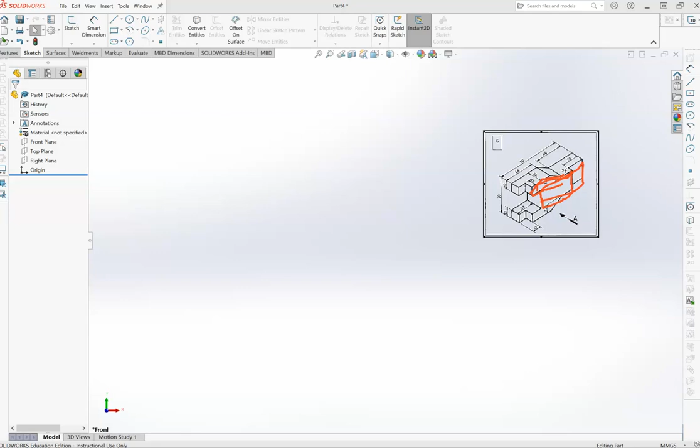So I'm going to show you how I would approach this, and it might not be the same way that you would approach it, but that's fine. We just have to make sure that we're getting all of the things that we can see and getting all of the dimensions right.

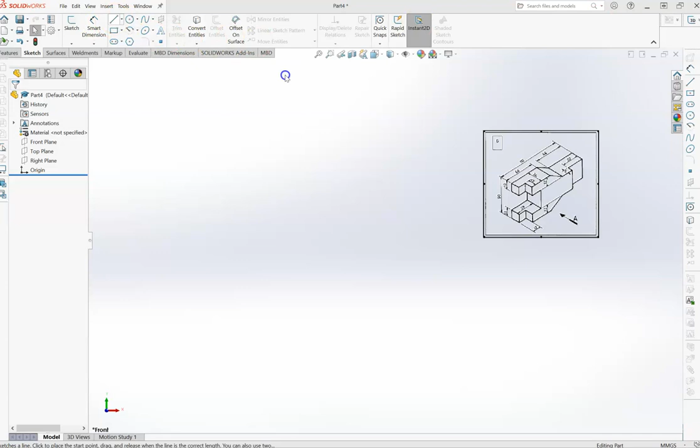Okay, so the first thing that I'm going to do is I'm going to draw this Y shape that's on the front. I think that's going to be the most straightforward for me. And so I want to use my pen tool. I want to do it on the front plane. Click the pen tool, and here we go.

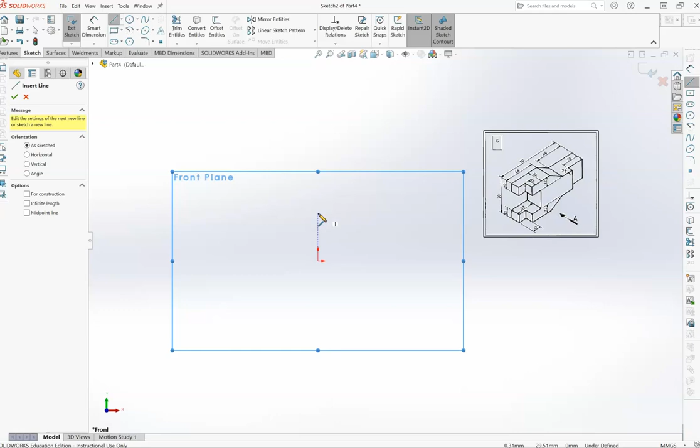So from the center, I'm going to draw the top of that Y. So I'm going to go left, and I've got 46 is the measurement for that bit there, 46. And then I've got 12 millimeters.

Remember, we're going to use the snapping to vertical. And then that bit's 28, and that bit's 12. So 28 minus 12 is 16. And then the height of that centerpiece is 50 minus 12 minus 12. That's 26.

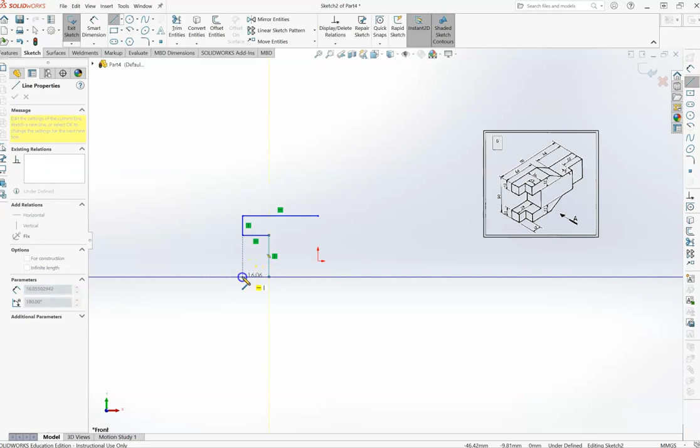About there somewhere. And then we want the next bit to line up. And the next bit is 12. And then we want this bit to line up. Should be 46.

Okay, and then we have these angles. So we generally never have a dimension on an angle. It's usually a dimension of the pieces of the triangle that make it up. So I'm just going to draw an angle for the time being, and we'll fix it in a second. And then I need the next bit, which is 44 minus 20, which is 24.

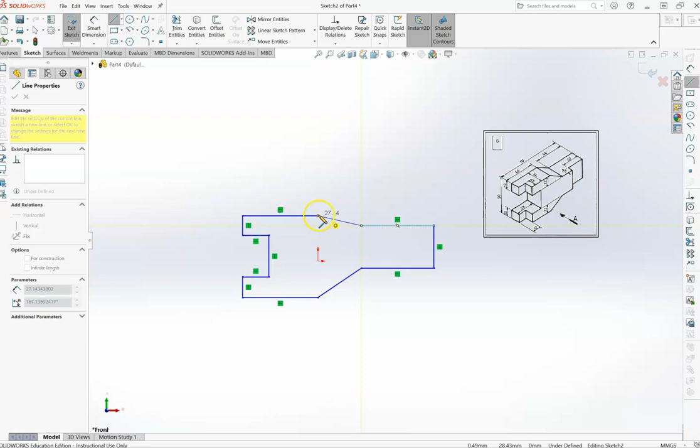We just might do the whole 44, and I'll cut that piece out. Whole 44, and then up. That's that 26 again, and then back to line up with there, and then angle. Okay, so I know that I joined it all together.

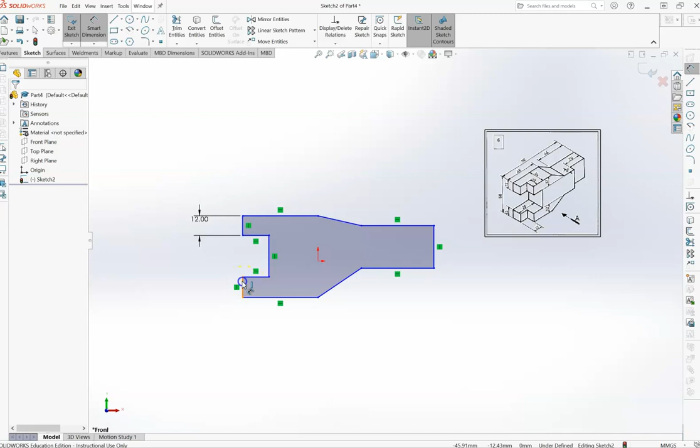Let's use the smart dimension to get this to work. Okay, so we want that to be 12. We want that. Oops. This one here, not the center line. Make sure you're on the line and not the dot. Is 12. This one here is 26.

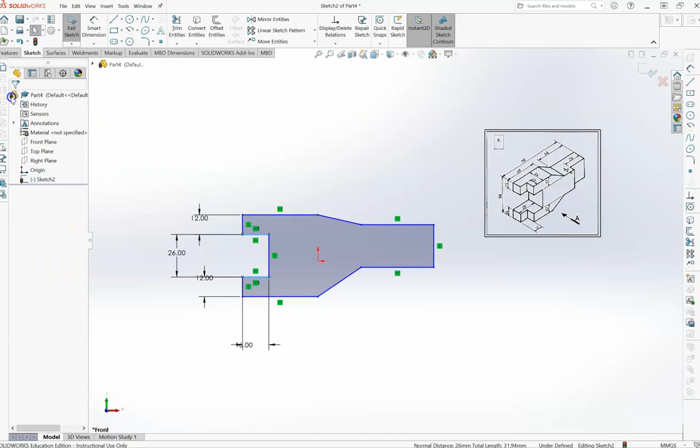Okay, then I have this one is worked out 16. 28 minus 12 is 16. And this one, turn the smart dimension off and make sure that this line and this line are equal. Tick. Now equal. And this line and this line are equal.

And this line and this line are equal. I'm just going to force all of that. And then this line, let's smart dimension. This line here is our 50 minus 24, which is 26. And this line here is 44.

And then we know that the front bit's 46, the back bit's 44, which is 90, and this center bit, sorry, the whole thing is 110. So I can have the whole length. What I do is click the front, hold down the shift, click the back, and make sure that is 110.

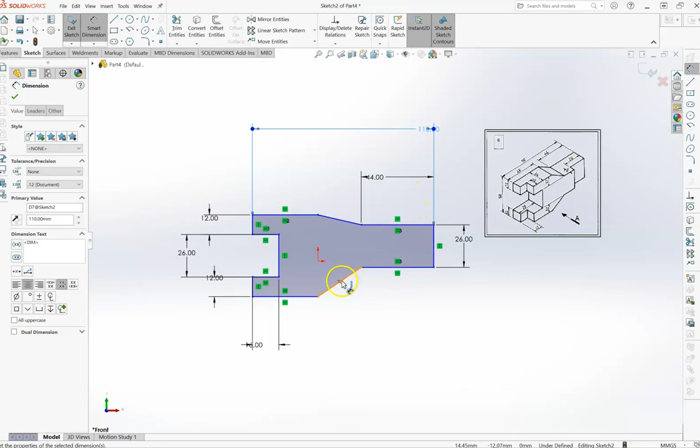Yep, and then I can make sure that this one, hold down the shift key, and whoops, I was in smart dimension, sorry about that, turn smart dimension off. This one and this one are equal. And see how it just snapped it all into place? So now I have that really nice Y.

Okay, and now we have to extrude that, and we'll add the bits that we need, cut the bits that we need.

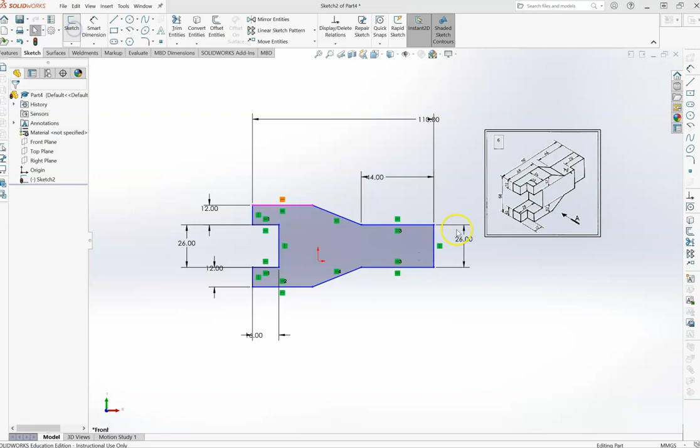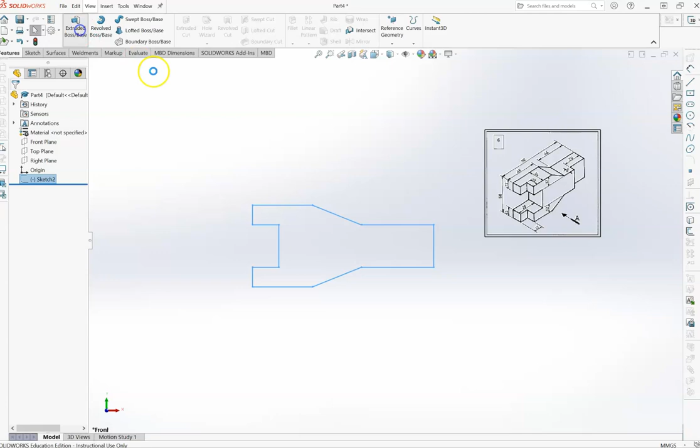Okay, so I'm going to exit this sketch, and we're going to extrude this sketch. So let's go to features, we want this to be, let's go with 12. Yeah, let's go with 12, and then I'll show you how to do, no, let's go with 24. 24, extrude boss base. There are multiple ways that you can do anything, remember. 24, and tick, it's now 24, done.

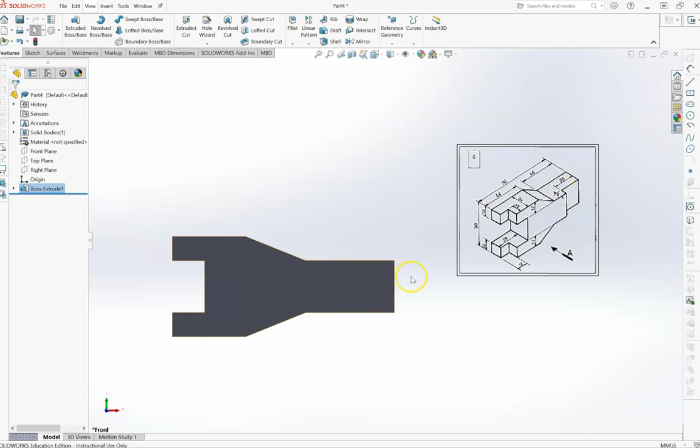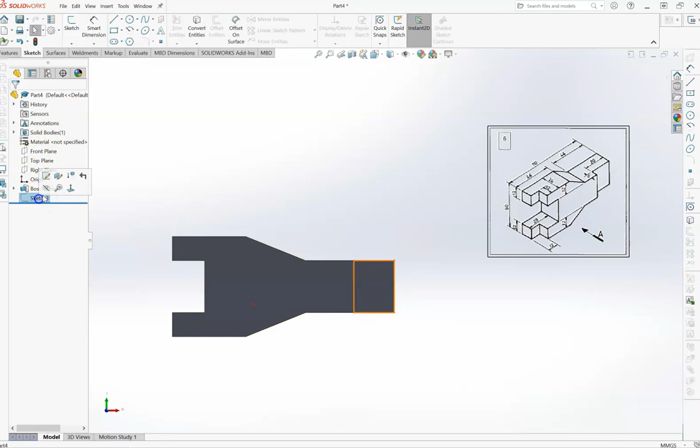Okay, so the problem that we have is we need to cut out a bit and we need to add a bit. So let's go to Control 1, let's draw out the bit that we need to cut. We need to cut on this face. So let's go to Sketch, and we want that to be from this corner down to here somewhere, and I'll smart dimension it to get it right. Okay, so that should be 20. 20, right, and so now I can cut that, highlight the sketch, features, extruded cut, and if you notice the cut is only 6 mils, so we've got to type that in, 6 mil, and tick.

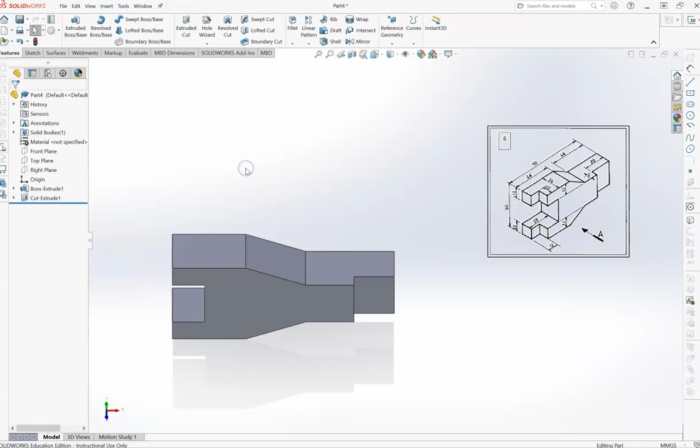There's my cutout, and now I need these bits here. Hang on, I'm just going to show them to you. These dicky outy bits here and here. Okay, so let's go draw those on. I'm best off making sure that I'm looking at the right face. Okay, and those bits are on this back end, so I'm going to draw here.

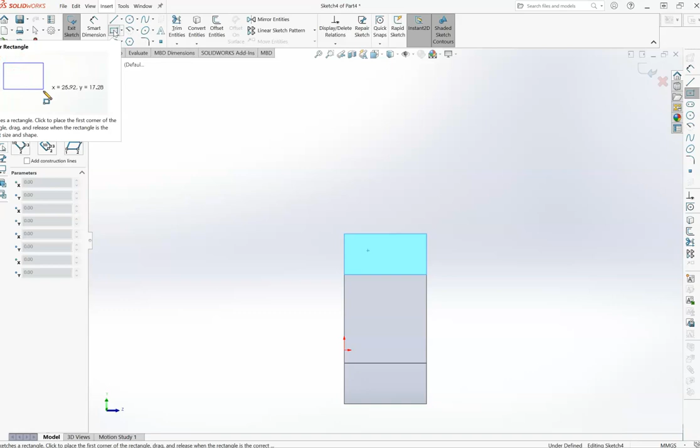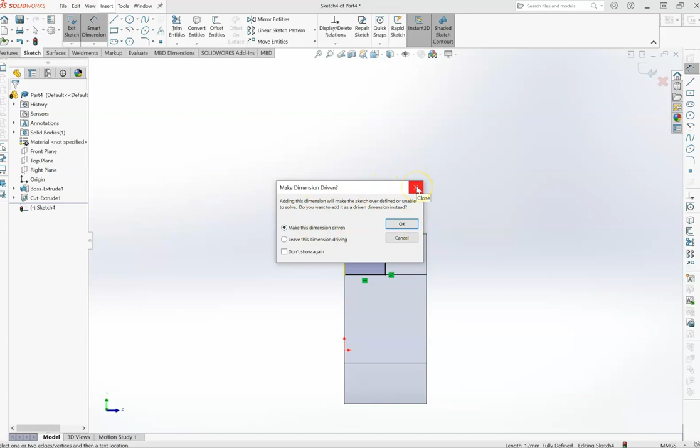And I'm going to draw a rectangle, and it should be 12 by 12, and then 12 deep. It's a cube. Draw from there to there. Now, you'll notice that because I snapped to the center, it's already determined that those two lines are equal. So that is a 12 by 12, but I can check it if you don't believe me. And that says, oh, you had it already at a set width because it was the half of the whole thing. And same thing here, it's going to tell me it's 12. Okay, so I know that that's right.

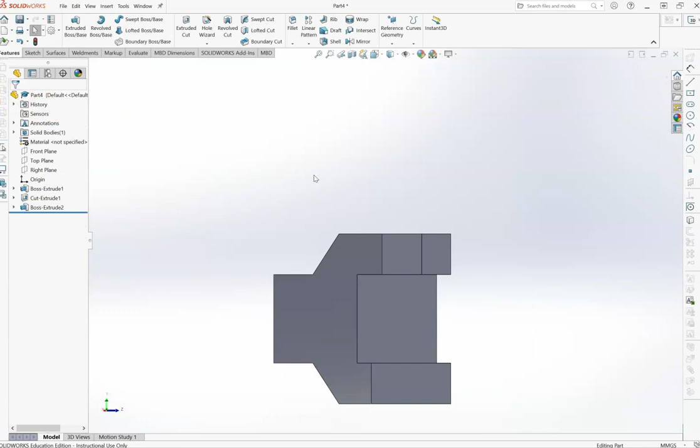Now I can exit that sketch and click on that sketch because I want to extrude it, and features, extrude. I want to extrude 12 mm. Tick. There is my beautiful extra bit, and I can do that extra bit down the bottom as well.

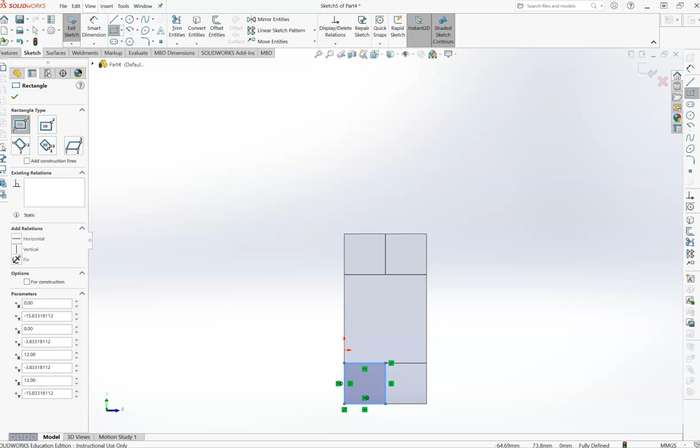Sketch, rectangle, from that corner to snaps in the middle, 12 by 12, everything's equal. Exit sketch, click on the sketch, and I want to feature, extrude 12. And now you'll see I've got the cutouts in the right place. It is a complex shape.